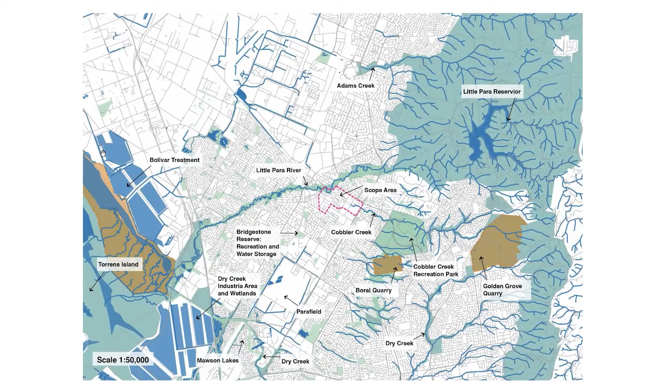The Salisbury East infill precinct is located about 20 kilometres north of Adelaide CBD, just to the side of the Salisbury Activity Centre, and it fronts the Little Para River, which is a seasonal ephemeral stream.

The precinct is in good walking distance to the train station, shops and council area, and it was selected as it's already undergoing some infill development, unplanned. It's seen as having great potential to house more people, as there's a number of undeveloped blocks, and in the process improve the amenity and the connectivity of this important realm that's in close connection to the river and the town centre.

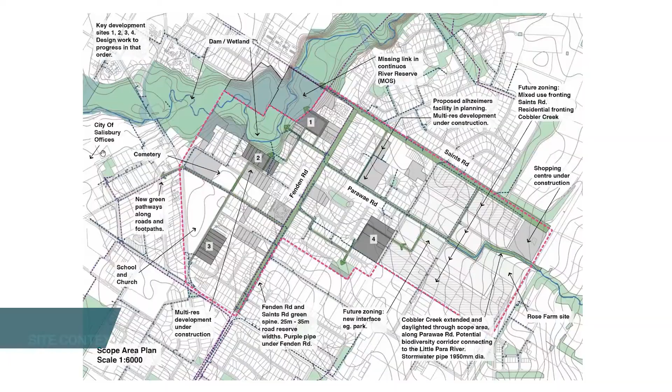The development that's happening there is, as is typical business as usual, car-based. It's got a lot of concrete surfaces. This is the type of development that's currently being built by the market in this precinct.

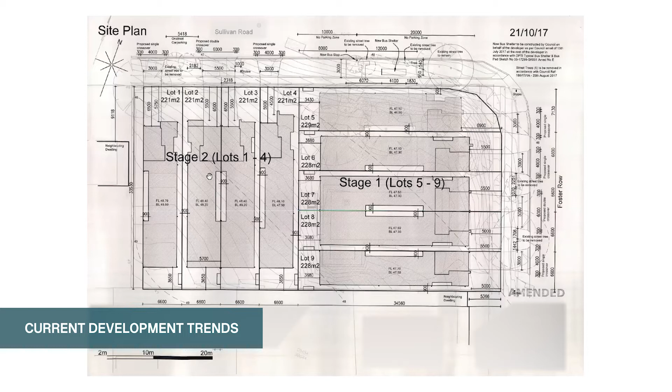Narrow side-by-side row housing with street frontages dominated by vehicle crossovers, very small courtyards to let light into rooms, and very small backyards. There's a large percentage of paved or impermeable surfaces and very low amenity for the spaces inside the dwellings.

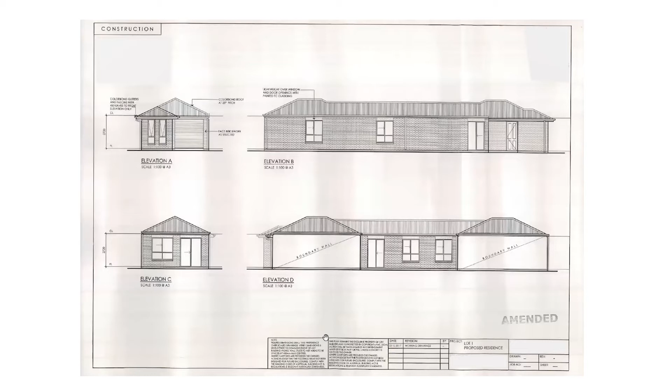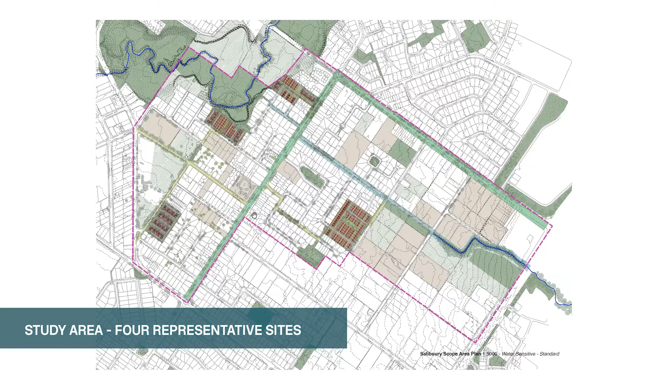So the study area, as I said, looks at these. We selected 4 representative sites that were real sites and likely to be developed in the opinion of the council and ourselves. And we used these to test some principles of what a water sensitive alternative might look like.

Site number 1 is currently like a market garden site. It's linked directly to the Little Para River Reserve. You can see the olive groves, the creek line here. There's remnant olive groves and very large canopy mature cypress trees that we were keen to retain. One of the principles of our water sensitive approach is to retain all existing significant trees and make sure we can leave good deep soil zones to plant new trees to increase the canopy cover across the suburb.

So we did some comparison hypothetical studies where we just continued the existing surrounding old style suburbia into this block and found we could get 13 dwellings at this density. We also applied that previous example I showed you of the row housing that's currently being built to the site and found we could get 42 dwellings of that side-by-side type.

And in our water sensitive mixed type development, we increased that yield to 69 dwellings, keeping all buildings at 2 to 3 stories. And we were able to do this while achieving pedestrian connectivity from Fenden Road down to the River Reserve, and importantly, keeping all the existing trees on the site, the big mature cypress pine and the olive grove as part of new public realm, and increasing the ability for additional trees to be planted.

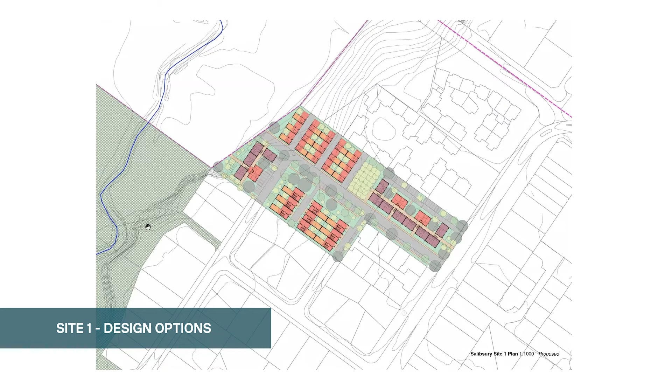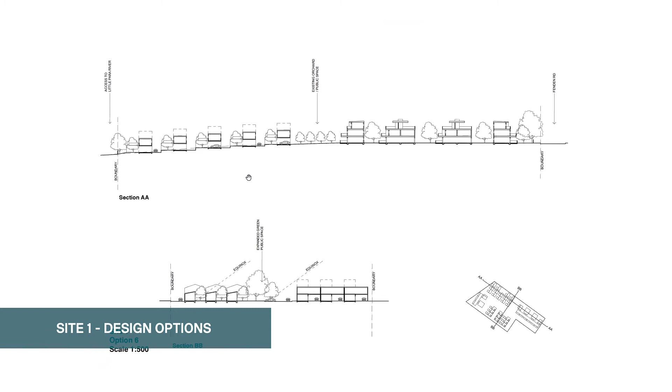The cross section looks something like this. So the existing olive grove in the middle, the River Reserve on the left-hand side and Fenden Road on the right-hand side. There were walk-up apartments of 1, 2 and 3 bedroom mix against the road, the olive grove, and then a series of row houses or courtyard houses, sort of 50% building and 50% garden, with vehicle parking integrated as we step down towards the river. The buildings were sited to retain the trees and get good passive solar sunlight into each living space, and to make sure the buildings don't overshadow their neighbours.

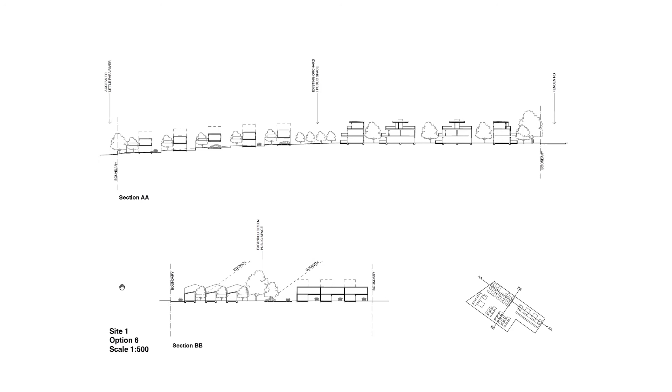The overall built form, it's just a schematic massing diagram, looks something like this, with the orchard in the middle here, the main pedestrian public linkage through to the public realm, and the courtyards and spaces between dwellings shown.

One of the principles of the water-sensitive approach to urban design is that each new development should not only work for itself, but should give something back to the public realm: increase connectivity, better tree canopy cover, more public realm space that's accessible to more people, and improve the streetscape and the public realm frontage.

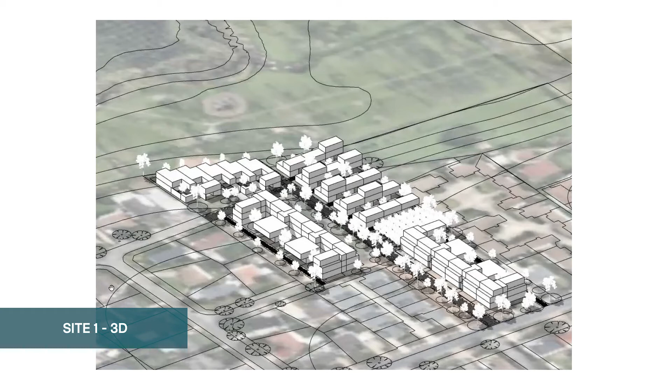The second example is a series of very long, large blocks that run between a suburban street here and the river public realm at their backyards. Currently, there's no connection between, and the public realm is fronted by a series of blank fences.

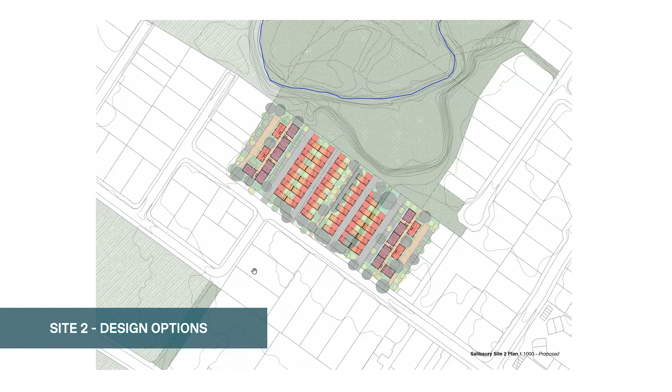We looked at applying similar building types of courtyard dwellings and walk-up low-level apartments that step down and enable us to retain existing trees on the site and increase a number of new pedestrian walkways, allowing people to have more access to the river space and for that river space to be more useful and more active with more passive surveillance and activation by people. So the overall tree canopy increases, the density increases, and the public realm connectivity increases in the process of infill development. The cross-section of that one looks something like this.

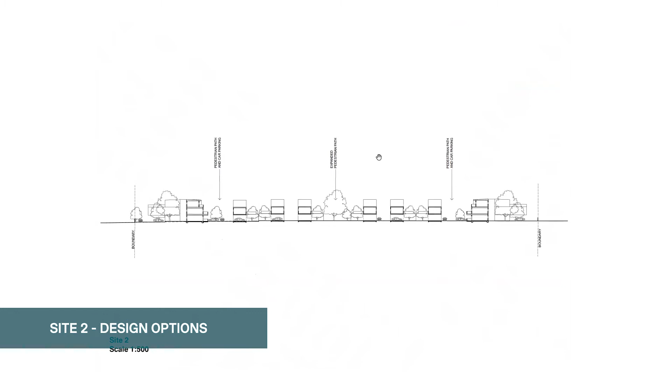Again, 2 to 3 story dwellings with large courtyards between, existing and new canopy trees, low-level apartment buildings on the edges that step down to meet lower-level neighbours so that they're not imposing from the view of the existing neighbours, and lots of space between the new dwellings with connectivity through between the street and the public realm.

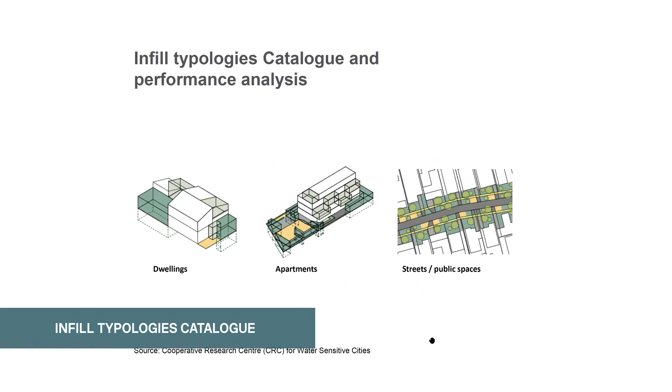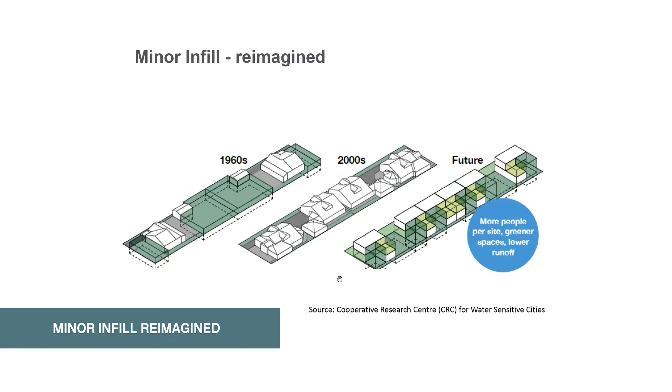The catalogue works with the IRP4 study to compare the performance of what might be called old style or traditional suburbs from the 1950s to the 1970s with what's currently happening in the market today with largely unplanned backyard infill and dual occupancies, and compares that to an imagined improved future with more density, more diversity, and better hydrological performance and better environmental performance, lower heat, and so on. In very basic terms, the water sensitive models achieve a higher density but a similar unbuilt and pervious fraction to the original suburbs. So we can increase the density and improve the performance quite dramatically from the current infill practice, which is shown in the centre.

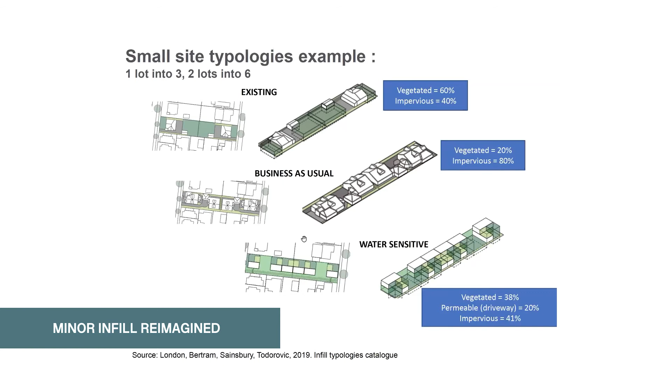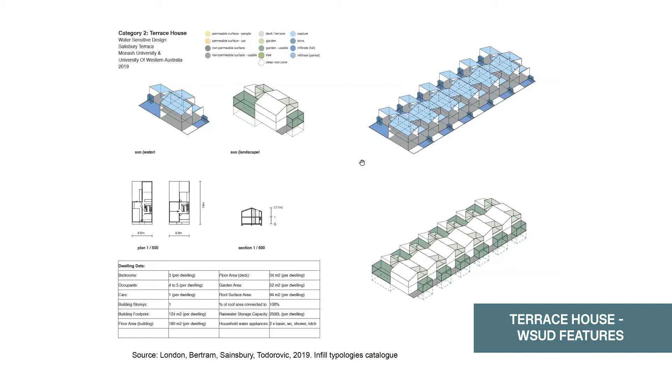And the blue diagram shows the water surfaces. So we've got water capture on the roofs in pale blue, water storage in tanks shown in the darker blue, and water infiltration into the natural permeable soil shown in the middle blue. All of those elements of open space types and water capture, storage and treatment types are important to be thought of as the total system. So this dwelling type has a range of simple, flexible rooms that all have good access to quality outdoor space, and think about the amenity of the streetscape, the amenity of the internal space, and the scale relationships from neighbour to neighbour.

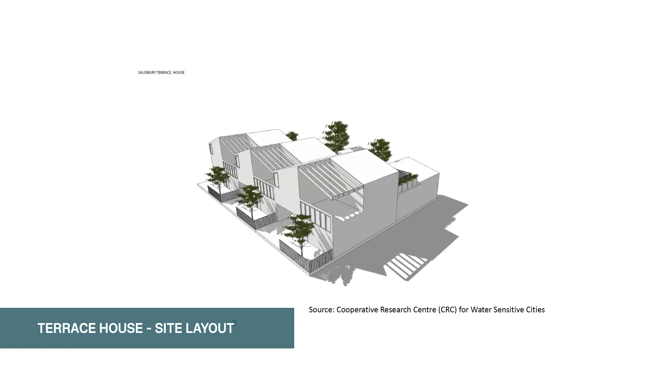The plan shows some principles that underlie all the examples that are in the infill typologies catalogue at different scales. They are things like car parking should be provided, but all car spaces should also be multi-use and able to be used in flexible ways, such as if the car was removed or parked in the street, or if you didn't need a car. So the garage here is a covered outdoor space that links directly to the courtyard garden. It's able to have the garage door left open and create a good visual connection from the garden to the street. The garden takes up half the width of the block, and the living spaces are directly accessible to a large, generous courtyard space that's usable functionally and also usable for growing trees and providing more canopy shade.

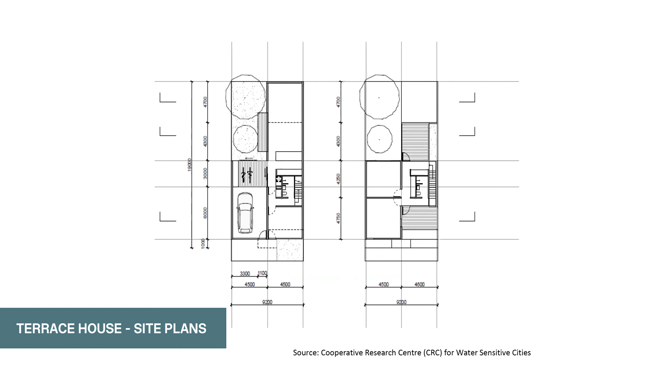All the rooms upstairs are large bedrooms that could be subdivided into smaller children's spaces, or they could be opened up and joined together into a studio workspace. Service areas are compact and located directly above each other for ease of plumbing. And there's a ground floor room facing the street that could be a third bedroom or a study or a work from home space with its own entrance. So a simple functional layout that's got lots of inbuilt flexibility and all the key relationships for good passive design and good streetscape are included.

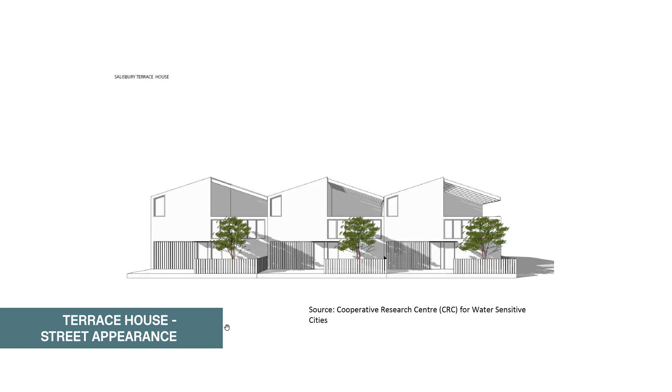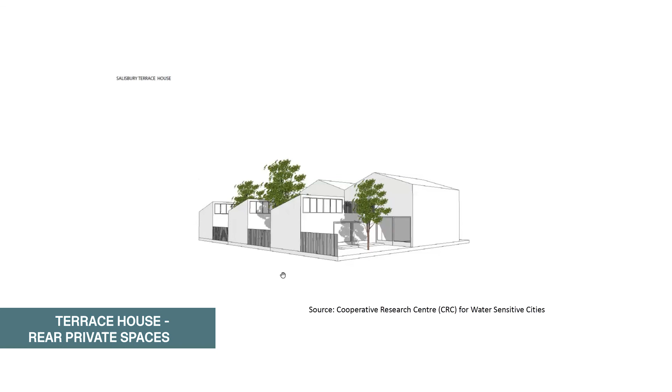The street profile shows the sort of home office rooms and the covered garage spaces linking through to courtyards. It encourages the idea that the garage door might be left open, but when the garage door is closed, the design is such that some light still comes through and it's not a blank garage door. There's terraces above to animate the streetscape. The rear spaces are also developed in a way that the buildings don't overshadow their neighbours, and there's enough space between buildings left, in this case 4.5 metres, to have a generous courtyard space able to grow a proper tree, and it connects directly to the covered garage space and bicycle storage and so on in the distance.